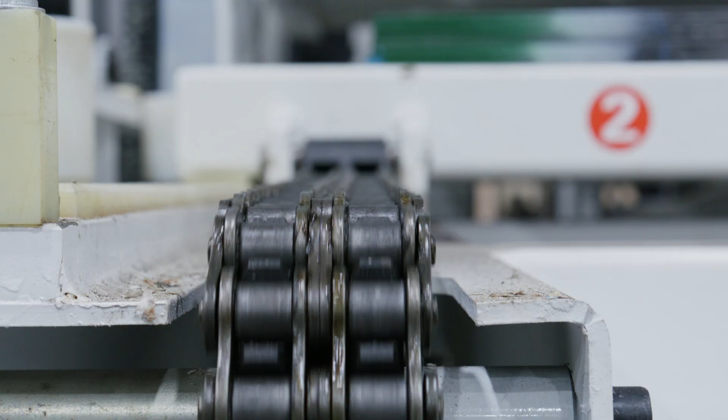So to start, let's look at the front of the car. Essentially what we have is as these bars come down, I have a point of contact that I actually am not a fan of anymore. Kind of with all the designs, they change over time. When I designed this thing originally, I had more of a rally car idea in mind, but I want to pull this back and have an approach angle on this that's a little bit more, I think it's a little bit safer.

So what we're going to do is, as I design the suspension, I'm going to end up putting in a bar across here and I'm going to tie it back and pull this whole front nose back. So we're going to have kind of a wedge design here, similar to most trophy trucks that you're going to see. Along with that, I'm going to build in a sheet metal mounting system in here that's going to be able to grab onto the front, upper and lower, and also mount my steering rack.

So the idea is that I want a similar spacing between my upper and lowers that I did on the rear suspension, which is 8 inches center to center. And then I'm also going to put in my steering rack in line with those. So as the suspension travels up and down with my steering straight, we're going to have little to no bump steer. So the next thing is we're going to reverse this entire thing into CAD, and then we're going to put those mounting points in space based off of my steering rack.

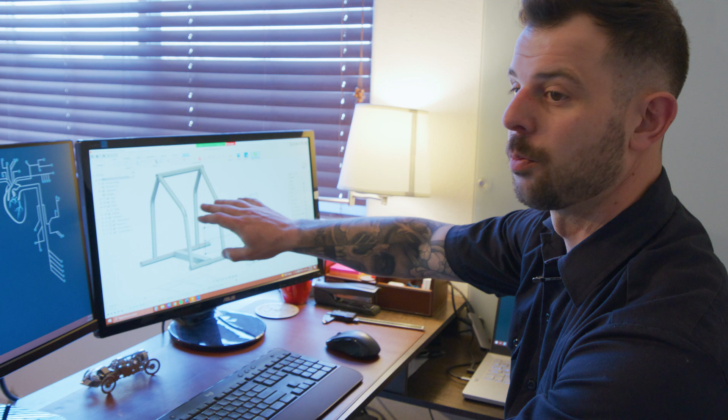So the first thing that I did is I reversed that whole front clip that's on the race car based off those measurements that we just took in the shop. I can give you a little 3D view. We have these bars that come down here, and I want to know essentially where I can put those suspension points within the center of the car with respect to where the tire and outside suspension is going to lay. Like I said earlier in the video, I want to have the suspension points on the chassis side to be 9 inches overall.

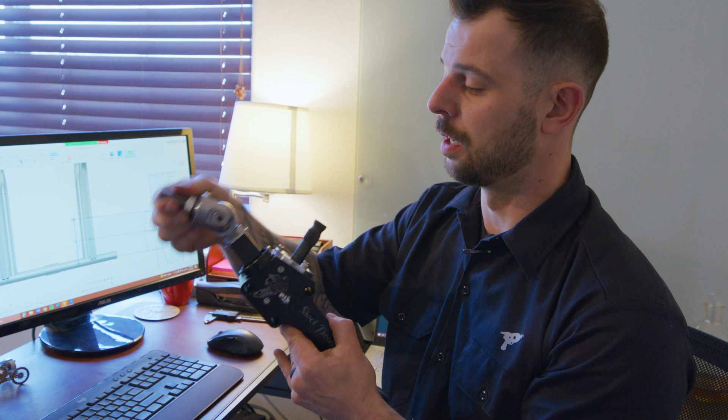I think I actually said 8 inches earlier, but I measured it and it's actually 9. So it's going to be 4.5 inches split off of where the center of the rack is. So this point right here is going to be the center of our rack, our heims that are on our rack. I have a Shock Therapy XP steering rack here. So this point of contact right here is going to be this point, along with the heims that are going to be on the A-arm. So we have a heim here that's going to be at that upper point.

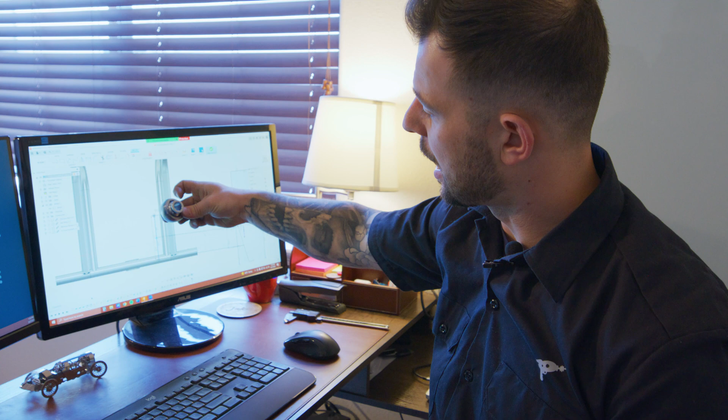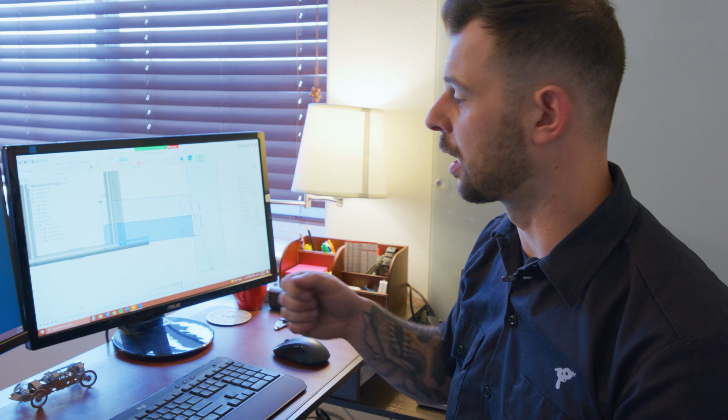What this is going to do is if I translate this to be the same spacing and I end up having that kingpin angle put in there, and I put in the right points of contact here, we can have that kingpin angle come down into the center. That's going to reduce any feedback in the steering. And then if we keep our spacing consistent, we're going to have a lot less change in camber as we're rolling through. And so that tire is going to want to travel a little bit better.

So we're going to end up having camber into the car. So as I roll into the corners, we're going to end up having the tires straighten up. And then the caster is going to be set when we build the A-arms, so we're not really too concerned about the caster right now. So as I roll this up and we look at this car from a different angle, we're going to see here, I just kind of centered everything in here.

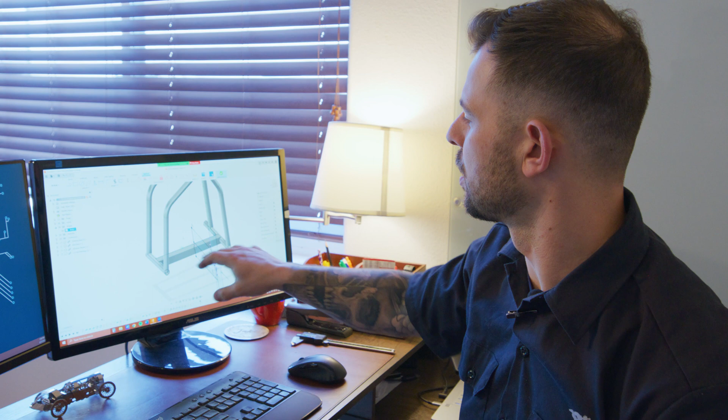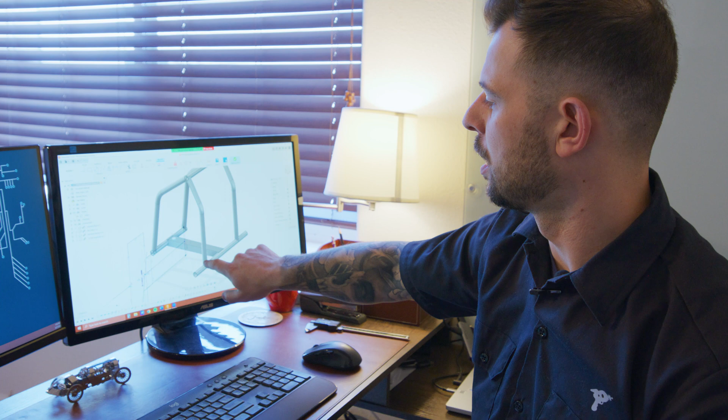So the next thing I'm going to do is go ahead and translate. I want to translate these upper and lower mounts. I want to put ones as far forward as I can get it here and here, and then I want to end up having ones that are about halfway back. And so I'm going to arbitrarily set those, and then we'll get into actually combining everything into one sheet metal design. So let's keep working on this.

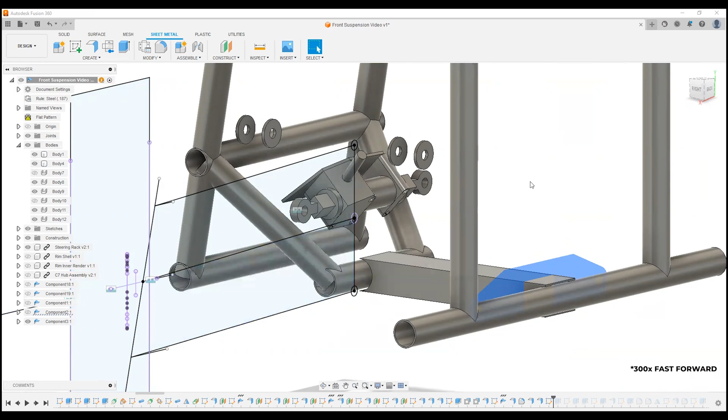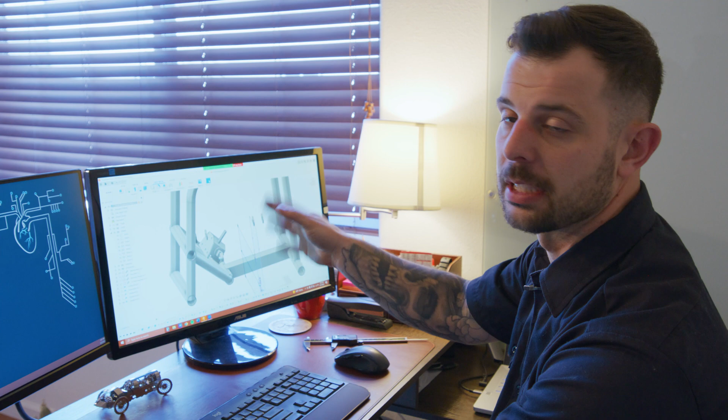Fast forward a little bit in the process, I'm gonna talk through what I've gotten through now, so we don't have this long montage. So following off of those upper mounts, I ended up adding another mount. And then the next thing we needed to do is establish where we want that steering rack to be. And so I went ahead and reversed the steering rack.

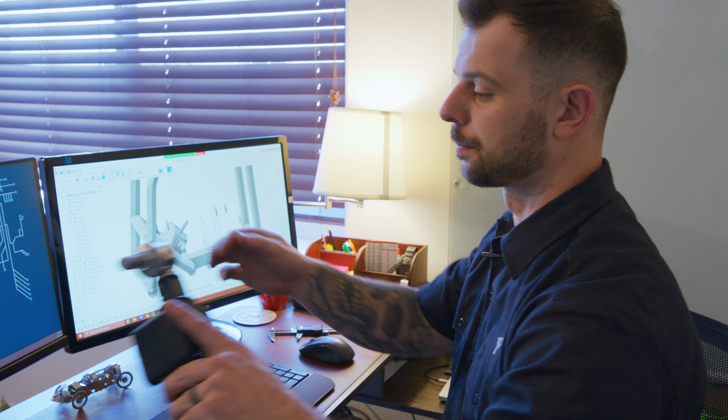So the most important thing is that we have this clearance that we need to have on the front end of this, as well as there's two holes here. And so I measured center to center on the rack to establish the width that we want to be at. And that determines how far off the center is from the center of the car to the center of these holes here.

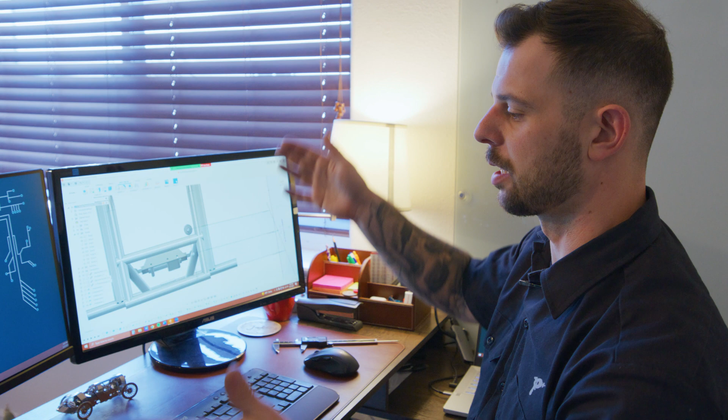So when I'm actually driving straight down the road, we're not going to end up having these be inboard or outboard, because what that'll end up doing is as that wheel's coming up and down, it's going to make the tires try to chase that radius and end up resulting in bump steering, a lot of feedback in the steering.

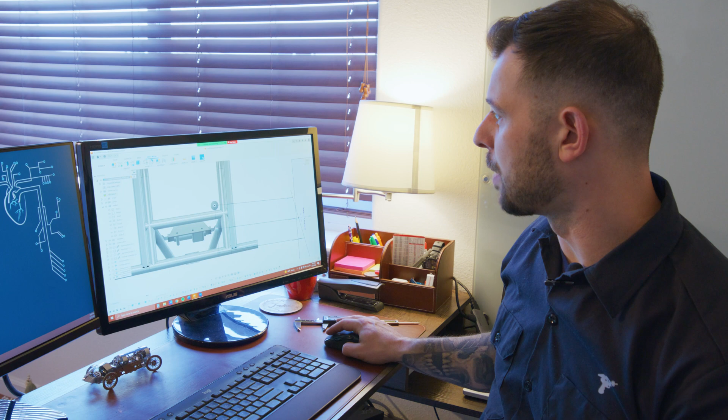So now that I have that established, you can see here, if we look at it on the front view, we're going to have that steering rack mounted. We can see here that if I end up hiding this body, we have the center of that rack, and I have these roughed in right now, but they're accurate. The center of that rack is going to be in the center of that steering location, as well as these two now are lining up.

I went ahead and also removed, or you can actually see the part that we're removing. So this is actually where it currently is. We're going to actually end up pulling this rectangular tube back and end up having that approach angle that we talked about earlier. So it'll end up looking a little bit like this in the end.

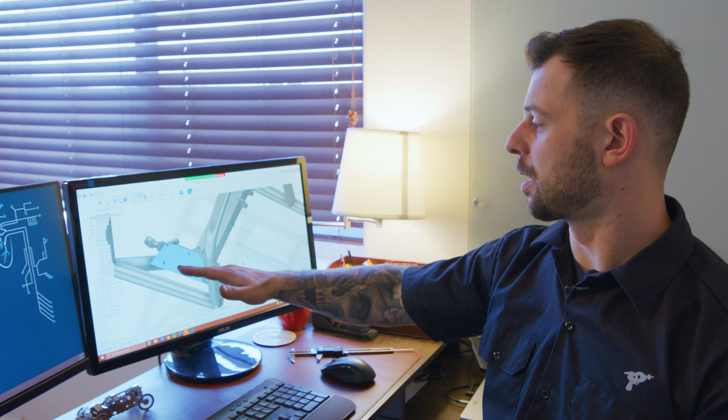Also, I ended up creating the initial flange that we're going to have in here. What I imagine is that this is going to come in and have a one-piece design that mounts the lower, and then it's going to come back, grab onto my steering rack, and then come back up and grab onto my upper mount. And it's going to be a one-piece design there. Then we'll have a double shear mount.

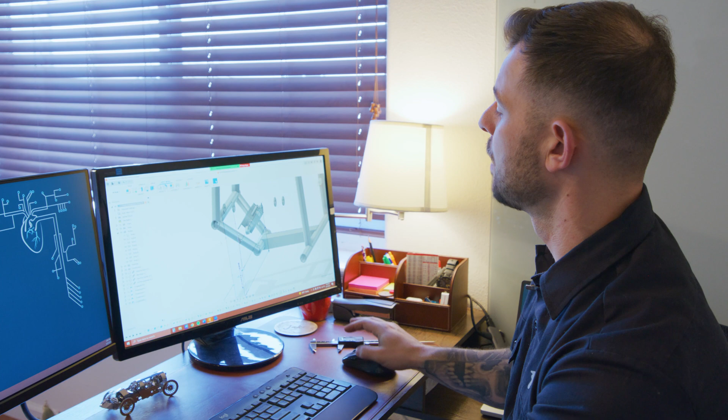And we're gonna do the same thing with the back mounts of the upper and lower A-arms. We're gonna have this little U or C channel that comes back up. So everything's moving forward. I ended up making these, they're spaced, I believe, yeah, 12 inches center to center on my upper A-arm. What that's going to do is it just gives us that little bit of space.

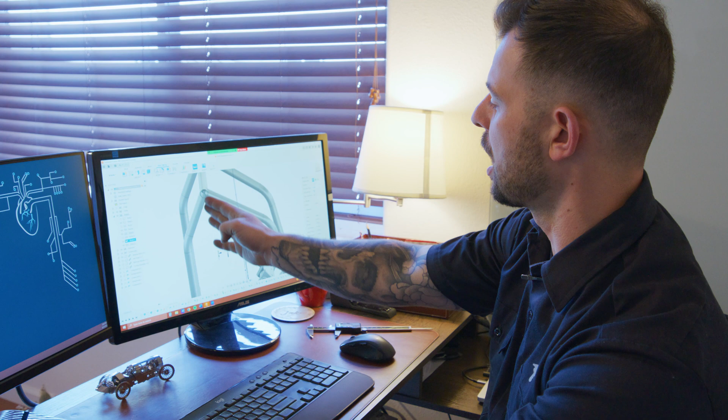I imagine that the shock is going to run here. So this A-arm is going to have to loop around a little bit just to make sure we have clearance of that shock tower and the spring assembly. But it looks like we're making good progress right now. I'm going to go ahead and move forward. We're going to fast forward into the next step, and then I'll explain that.

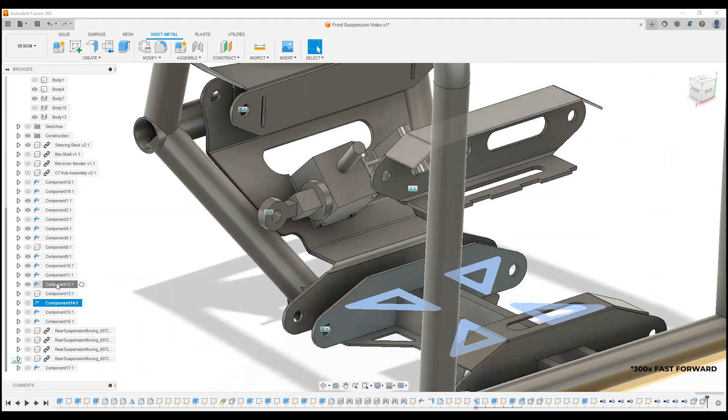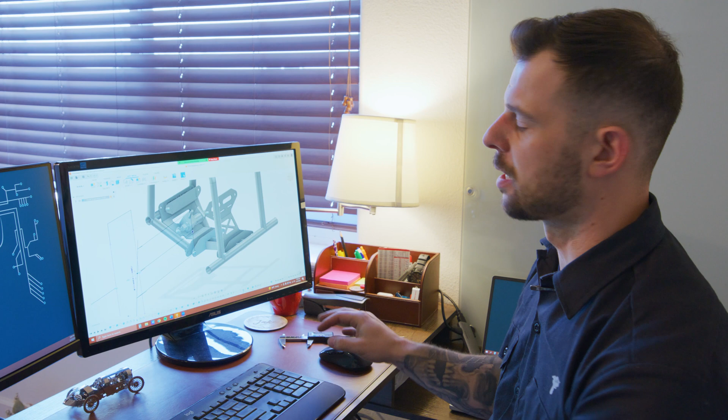So fast forward a lot. This took a lot of thinking and going back and forth, but now we're solidifying this design kind of like I talked about. The plans are still the same. I have the front and lower mounts that are going to be jogging in like an S or a little joggle forward. What we're looking at is I just want to be consistent and make sure that my lower and upper mounting points are still good.

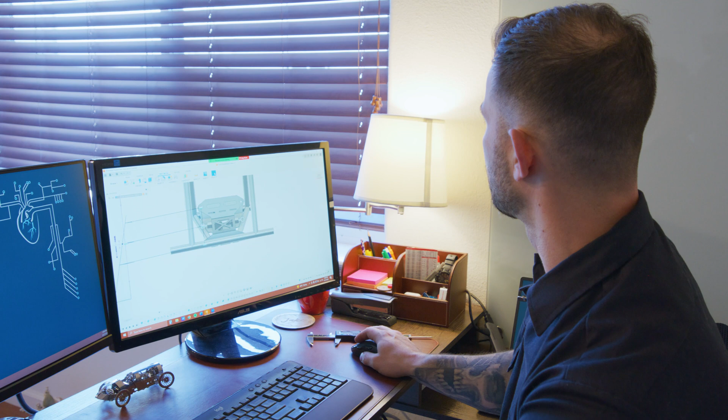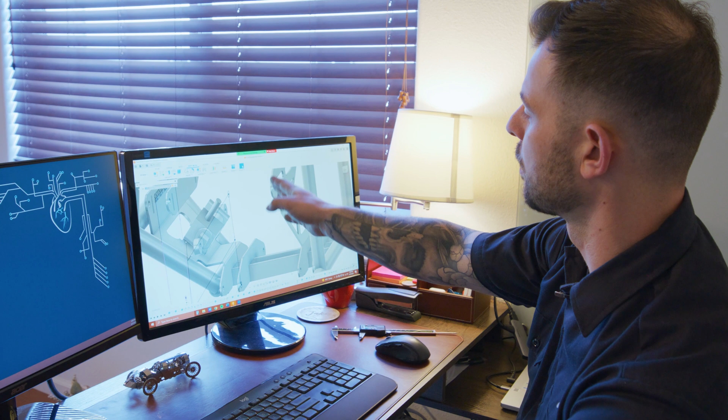So as we look at this, I guess we can't really see it from this side. Let's flip it around to the front. We can see here, we still have the upper and lower mounts centered on my original drawing, as well as the steering is still in there. What we ended up doing is I still have that steering rack kind of tied in here. I have this one jogging up, and then it S's up. I spaced this out, we mirrored it over, and then I also repeated that same entire program up here. So that's gonna S over and up.

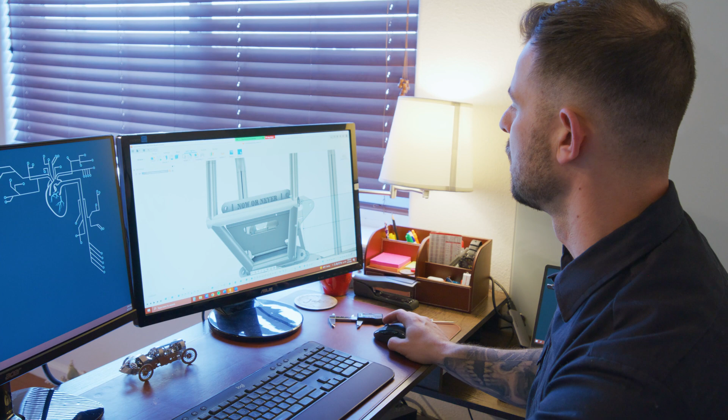It looks really good. We added a little text up here. There's some pizzazz on the design. It's always kind of fun to look at that. And then I also added an access hole here. So what we're gonna end up doing is I'm gonna make a mount that ties in sideways and comes up and ties into these through holes right here. We're gonna have a tab and slot design there.

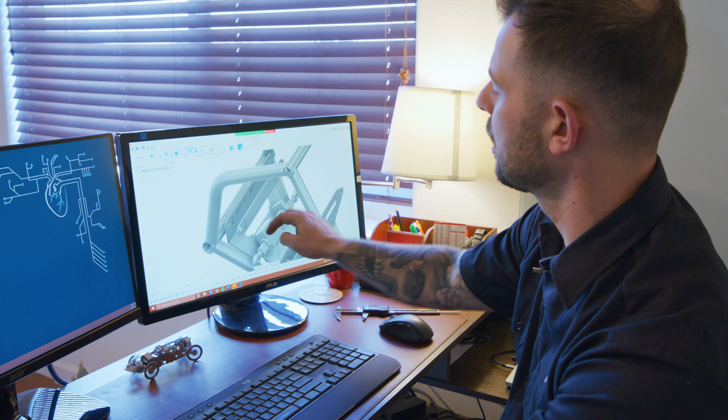And then along with those holes, the bolts are gonna actually come up through the bottom and through that plate. And so we'll have Allen key access from the bottom, and then we're gonna have nuts on the top. So you'll either be able to put a wrench on from this side, or you can wrap back around and see those nuts from the outside. So it gives us some accessibility to where our steering rack is in the design.

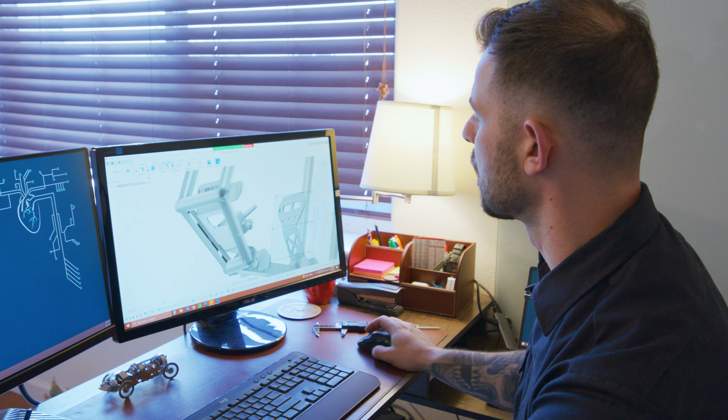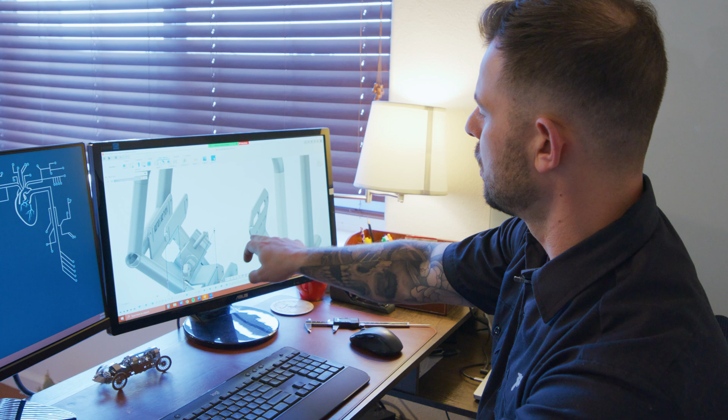Lastly, what we're gonna end up doing is we're just gonna gusset everything in. I wanna tie in and web in this entire structure from the front all the way to the back, and I want it to come all the way out as close as I can get to the heims, but still have clearance for articulation. I want to wrap this design in here to have double shear as well as in here, and then I gotta come up with a way to support this upper mount in the back. So this front one I'm going to tie obviously to these front bars.

The back mount I need to come up with some new bars coming from back to the front. What I imagine is I'm going to run bars laterally or horizontally across the car, and then we're gonna have bars that come down to that upper mount for the rear side of the upper A-arm. So I'm gonna go ahead and get back into it. We're gonna cut forward one more time. I'm hoping that this one's the final design. This one's taken me a while to figure out. There's a lot of little pieces that we're trying to look at, and then we're gonna go through each individual detail before we go check it out on the car.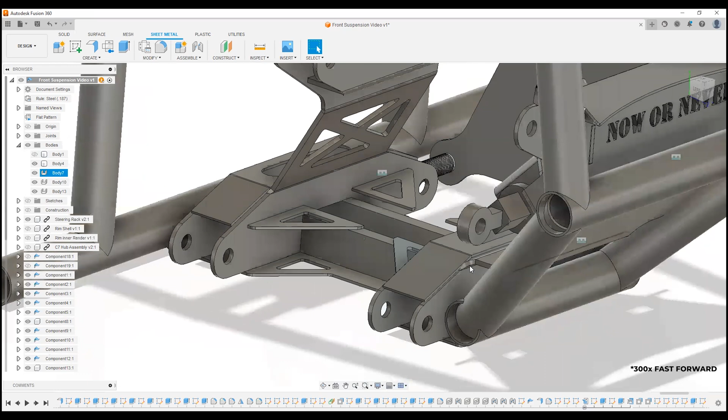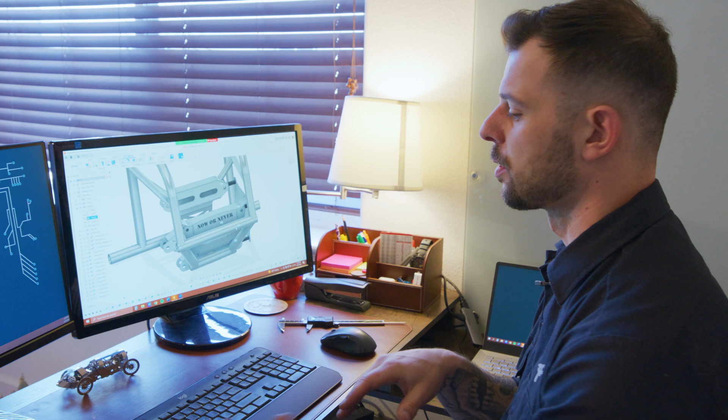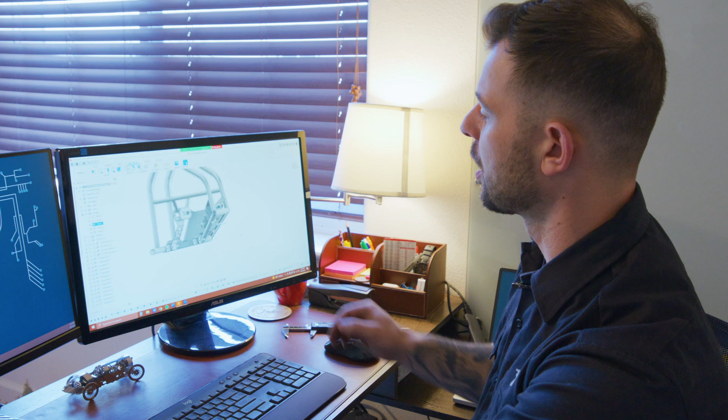So after a lot more work, I finally have kind of a finished design here, pending how it looks in cardboard and checking a lot of different templates in the shop off the CO2 laser. But let's talk through this one a little bit. So before, we had that bar come all the way down far forward and come back. We ended up cutting and triangulating this a little bit. It has a better approach angle, and a little bit better look in my honest opinion.

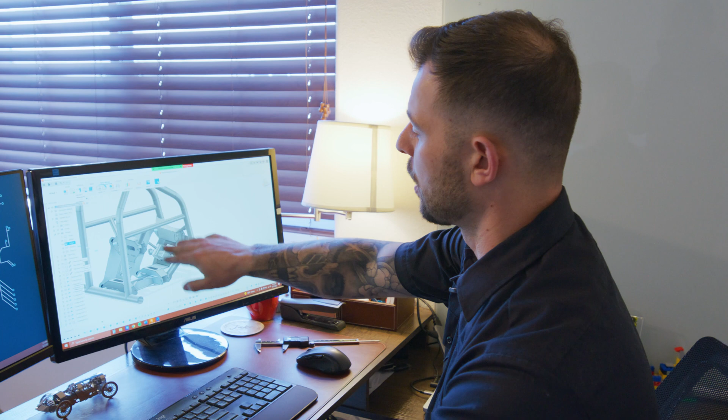With that being said, we have a steering rack that's fixed, right? So we're working based off of where the steering rack is and where those upper and lower A-arm mounts are going to be on the frame. That's really important for them to all be lined up, so we get rid of that bump steer, like I've said many times. And so I referenced the steering rack to start. And then we obviously have fixed holes that we're trying to match up. So this is gonna be the first thing that I check in the shop. I wanna make sure that I have that hole pattern correct before I order these parts in sheet metal.

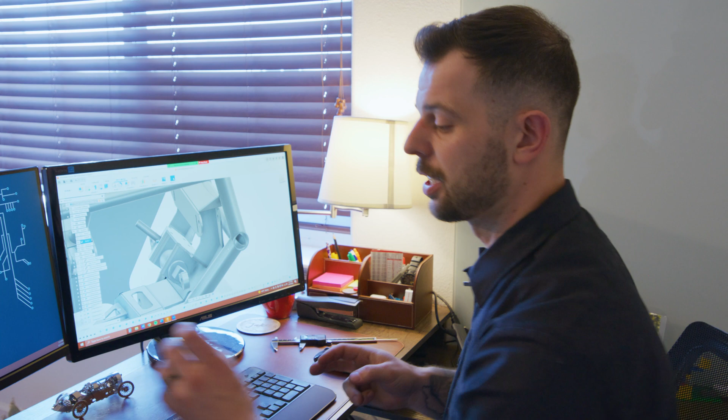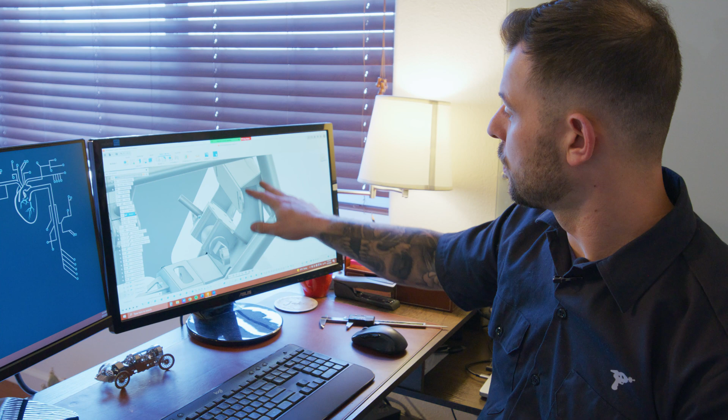The next thing is that we have a spacing between these upper and lower, or these double shear mounts. That's a fixed measurement. That's based off of spacers that I've purchased along with the Heim that we're gonna be running. We're running 5/8 bolts in the front, and then the spacing is 1.875. So what we're wanting to do is we just want to make sure that there is at least 1.875 in those upper and lower mounts. And that's going to be the same on all 4, or I guess all 8, left and right.

Lastly, what we're going to end up doing is we have this gusseted in area. So this square tubing actually runs all the way to the front right now. What we're going to do is we're going to cut that back. It's going to end up being cut flush with this one mount right here, and we're going to put in a new pipe there.

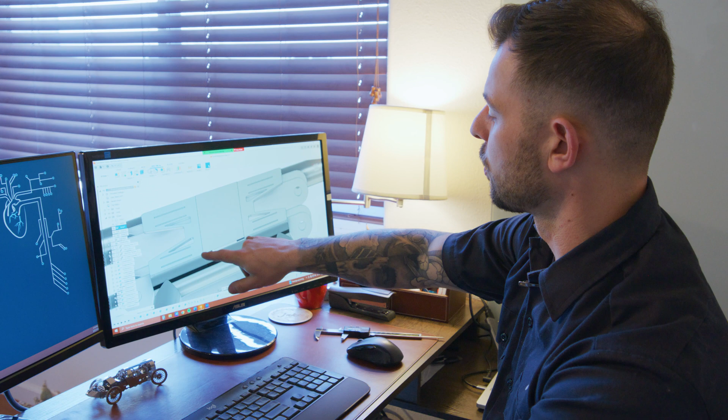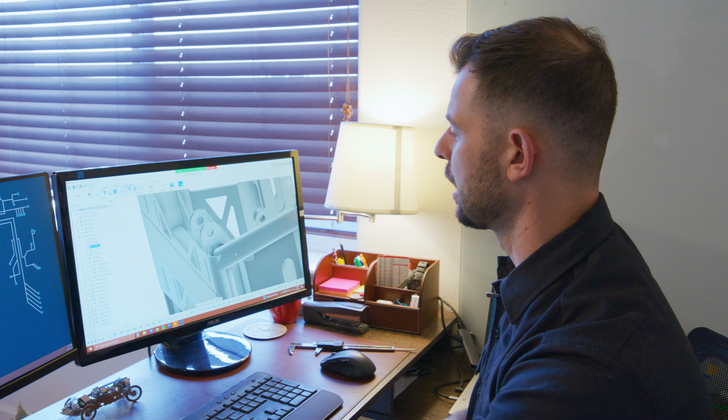Where these gussets are going to come in is they're going to tie in that whole area. They're also going to tie into a tab and slot design here. So these tabs right here are 0.1875 mild steel, and then we're going to end up having all of our gussets made out of 0.104 thou thick, just for that bridging or that gappage. That square tubing is flush with the bottom of the chassis. These are also going to be running flush, so we're just going to kind of weld it all in to tie it all in.

Lastly, we have some gussets here. I need to fix this little area right here still because it got cut on a different operation. But we have some gussets here. These are all going to be 0.104 thousandths mild steel, whereas all of our brackets are going to be that 0.187. So when we run from here to here, what is going to be nice is that this is going to be one unit that's going to add a lot of racking stability, as well as tie in this entire front suspension so that we have good stability in all axes.

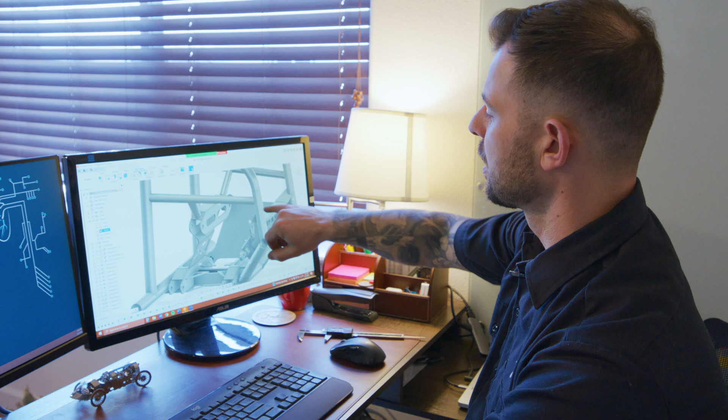Lastly, what we talked about last was running in this round tubing from front to rear. I just have it mocked in right now. This is all going to go into place, and then I'm going to weld this in last. So these will be the last things that I do on this front suspension mounting on the chassis. And that's just because it doesn't really matter where they're at. They're mostly there for stability. So it's more important that we have this in the right position first.

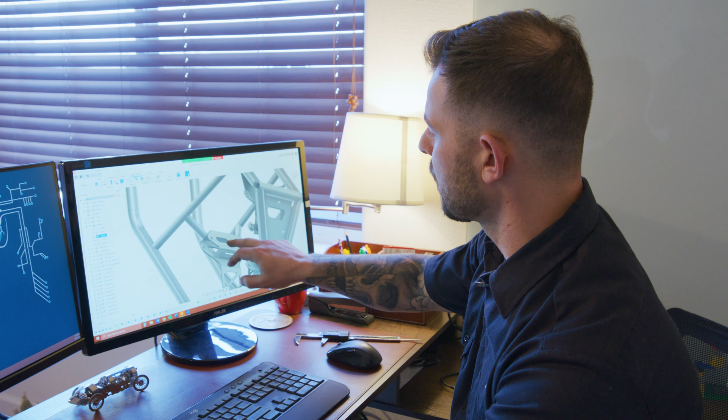This bracket right here is just an L bracket. So this L bracket comes around and ties in. We have tab and slot to make sure that it has good connection. And then I have essentially a 0.104 mild steel that's wrapping the top. This will get seam welded all the way down, and then these tubes are going to come in and attach on the top, and that's going to help with that stability also.

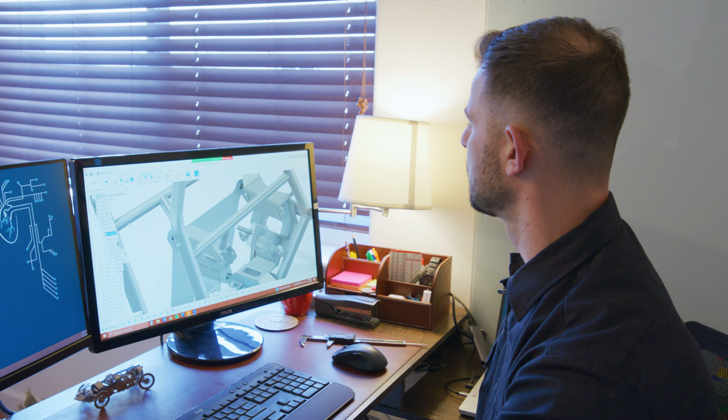Lastly, we have this little wing design here in the front. This is going to be just tied into there and dropping on the top. I don't have tabs on this one, mostly because I want it to float a little bit, because I don't really want it to determine where these mounting points are. I want those mounting points to be determined off of where the heims need to be.

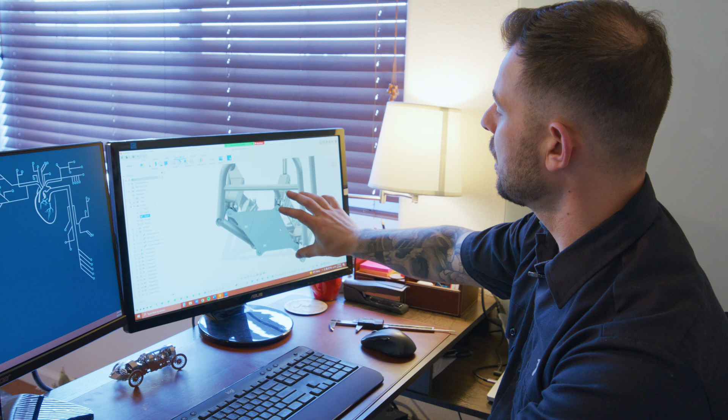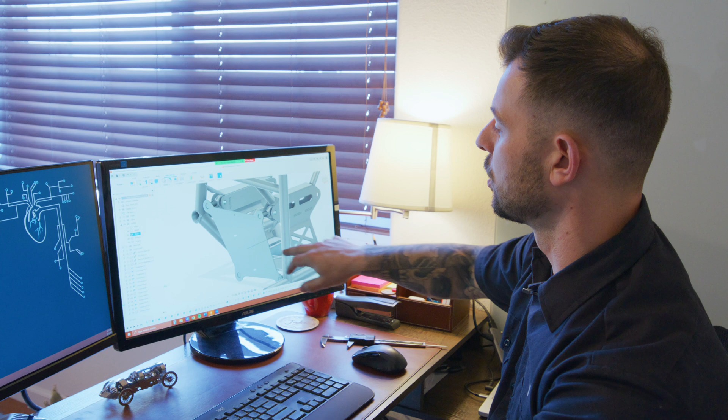And that leads me to the last thing that I did, which is I'm making a fixturing plate, and this one's just going to be out of some thinner aluminum. I'm putting a little small hole just to tell me which side is up, because it's going to be hard to tell orientation as we do this. But the idea is that this will slide onto the heims. We can put a nut on it, and then those heims can go into each corner. And with the spacers, this ends up determining each individual location. And so if I make 2 of these, one on each side, and I put it all together, we should be able to actually make this entire assembly on my weld table, or at least tack it together, and then drop it in one setup.

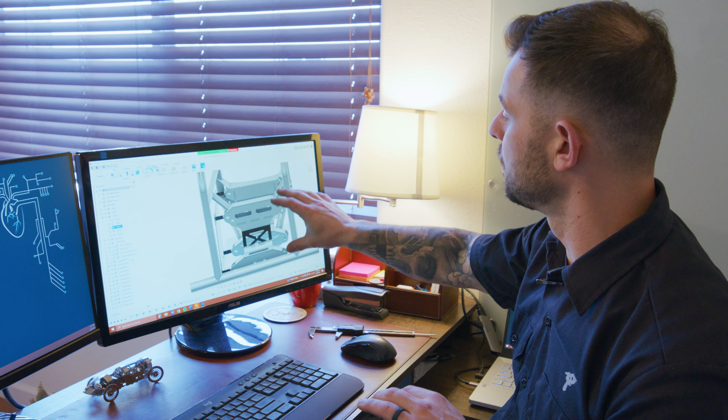And that'll save us a little bit of time in fixturing and holding and stuff inside the car. That's just the theory anyway. I also think it'd be a really slick way to do this, and I just want to experiment with this theory. So from here, let's go ahead and make some DXFs. I'm going to take you through a really quick tutorial on one of the more intricate ones, just on making a flat pattern. Then we're going to go cut them out in CO2 and get them in cardboard for this one.

So before we get too far into the flat pattern, I want to show you a couple tricks. I'm using Fusion 360. Most of the CAD programs have some kind of feature like this. And so when you have a lot of pieces like this, and we've gone through a lot of different iterations, so I have a couple hidden bodies and stuff, it's sometimes really hard and convoluted to figure out where those parts are at. And so if we want a specific part to check, or we want to make a flat pattern to start, it's really hard to figure out where it's at.

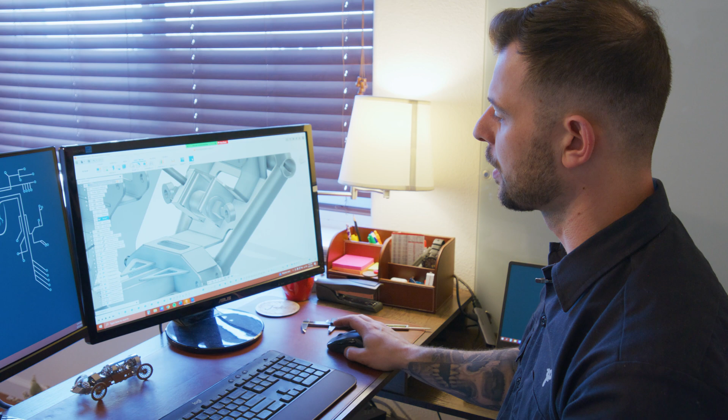So the first thing I typically do is I can right click on it, and I can say find in browser. What that's going to do is I have components. I typically try to make everything in components, because then they're individually sourced instead of bodies, which can be kind of convoluted, and if you make changes it kind of affects the assembly. But we can see this whole body here.

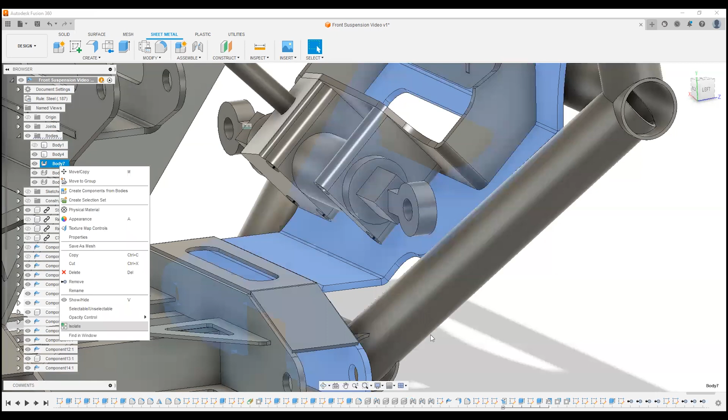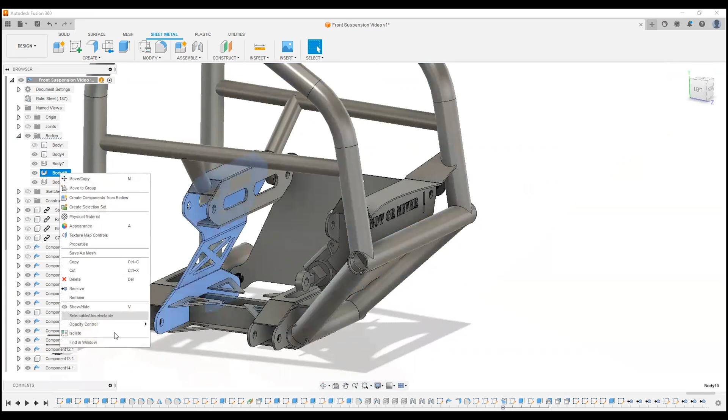Instead of having to go through and deselect all of them, there's an isolate feature on this. And the cool thing about that is that I click that, I isolate it down to just the one fixture, which is really cool. And then if we want to bring everything back, we can come back and unisolate, and we get the whole assembly back. It's a really cool trick that we can bounce back and forth between each individual component, and if we want to see this other one, we can bounce back and forth.

And so that leads me to my second point, is that when we create a flat pattern, there's kind of two different ways to do it. In Fusion, you can only create one flat pattern per assembly, but you can create one flat pattern per component. So what I typically try to do is I actually will select these and create a component from the body. What this does is I'll end up,

it's always something.

Oh, that's right. So we can't do it for sheet metal bodies. So that's a trick that I keep forgetting that I can't do here. But on this one right here, if I didn't select component the first time I made it, I'm kind of out of luck. So I gotta just do individual flat patterns. So now I can come up here, create flat pattern. I don't typically have a problem with each individual, like I can select any of these faces as my flat face. I'm just gonna pick this one, we're gonna create it.

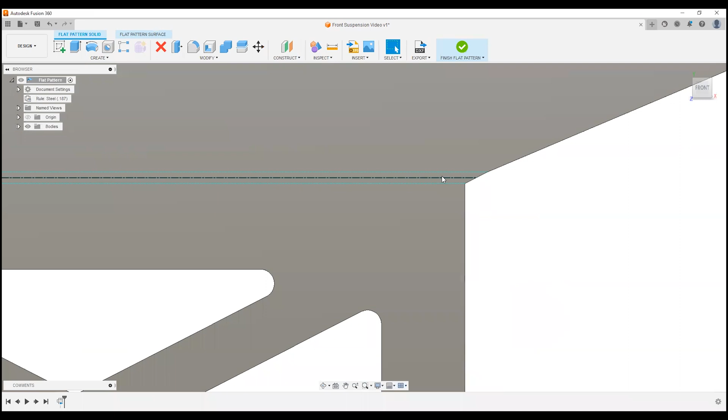So we're gonna see here, we're gonna pull in this DXF. So the last thing that we wanna do is we're gonna see here, we have our radius ends on each side of our bend center line. So we just wanna make sure that when we finish this, we wanna look at our sheet metal rules, where this part right here is 1875. We want to double check the K factor is correct, our thickness is correct, and our bend condition is correct,

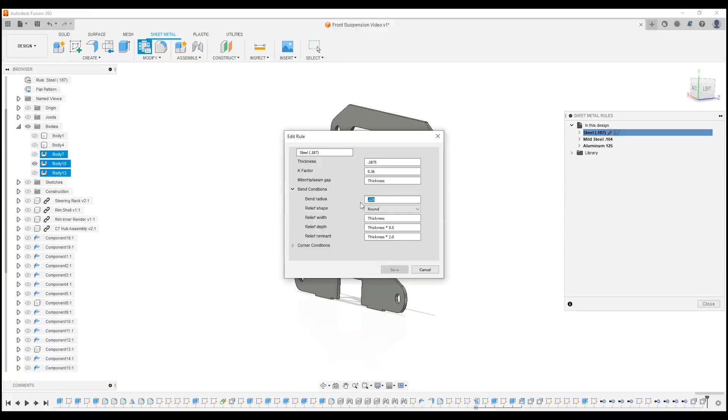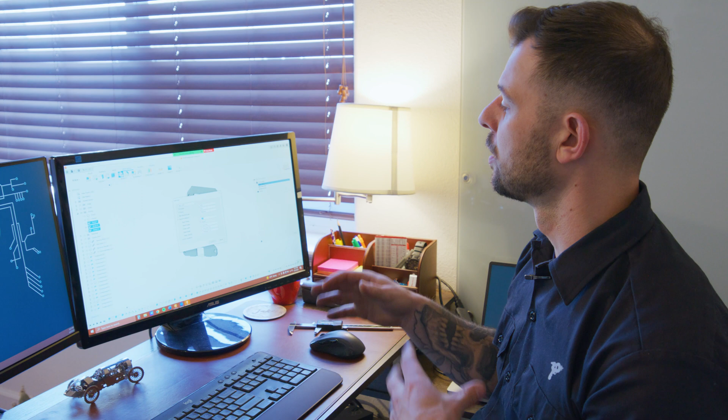our bend radius. Since we're using SendCutSend, we want to go to the material details on each individual material that we're using and make sure that those are correct so that these jogs are going to come out to the right amount of stretch. Since we're trying to locate two different components on both sides, it's really important to have those correct, because especially with two bends and a joggle like this, that could throw us off by 1/4 of an inch if we don't have those correct. So if we select that, everything looks good. I already double checked this kind of stuff.

We can go back into our flat pattern, activate. And so the cool thing is that we can export a DXF right here. And so Fusion makes it easy. I convert my splines to polylines and click OK.

And then we can save our DXF and move forward. If we're doing a normal flat part, a little trick that I typically use, and we're gonna unisolate this part so we can see something. Say this part right here, we're gonna find in browser because we have a lot of parts. And we're gonna isolate this part.

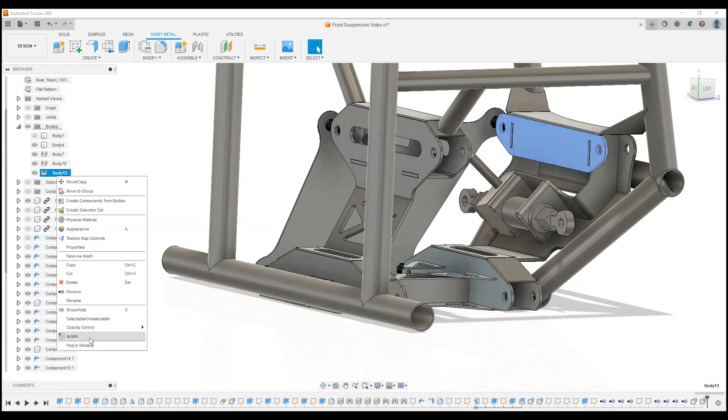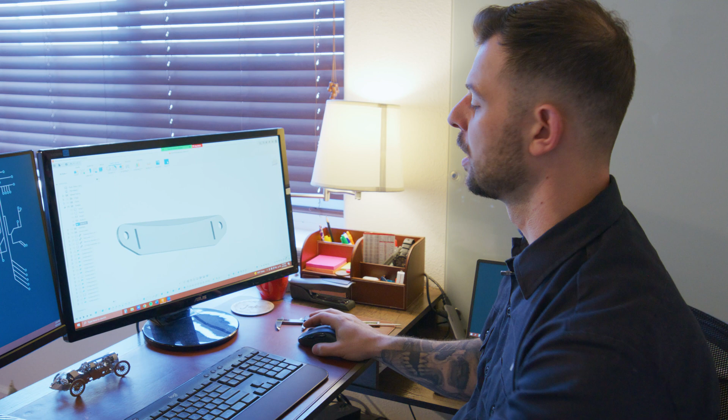So sometimes we end up having a part, I don't know why, sometimes I get these little artifacts that are built into this one. This is a really good example. And so to make sure that this line doesn't come through on this, most likely it's because I wanted this curve, and then I came back in and I re-extruded something to fill back in that area. And then you get these artifacts. This side doesn't have that artifact.

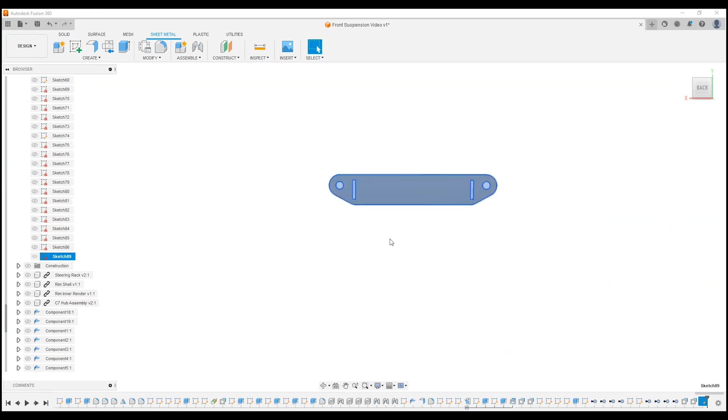So what I typically will do is come in and create a new sketch on this side and say finish. And then if I go to my sketches and I come all the way down, we have a lot of sketches in this design, and I select this one, you can see here that in blue now I have a perfect sketch of that. I'll right click on this and say save as DXF.

And what this does is, instead of using the last sketch that you had that has, say, dimensions in it, or that you used to extrude it, sometimes those have little artifacts. So once I have everything extruded and I have a nice clean face, I'll click on that face, create a sketch, and then I save the DXF off of that. It just cleans up your design, makes sure everything is where you wanted it to move forward.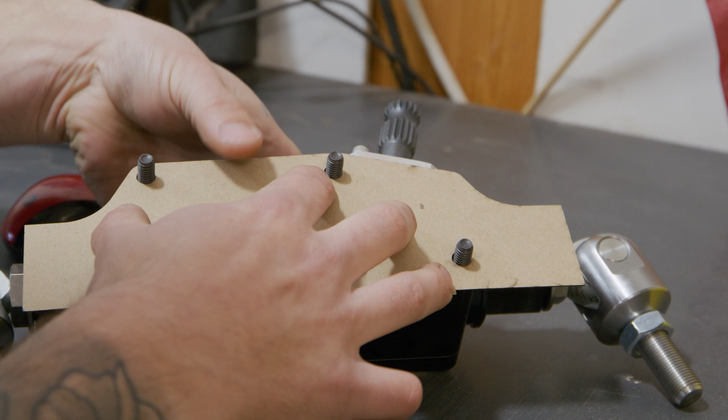So now that we're getting all these DXFs, let's go out in the shop and check this design. So what we're looking at on this is I want to just check my template and make sure that everything lines up. So we're going to flip this over. And then we're just checking hole pattern. I'm also checking to see how well I got that angle reversed. Everything looks like it's going to clear. So I think we're good to go there.

So the next step is now we're gonna cut that whole assembly out of cardboard so we can actually glue it together and mock it up for the car. While the other parts are getting cut out on my CO2 laser, I'm gonna double down on my time and start gluing these up as they're coming off to get this final assembly done.

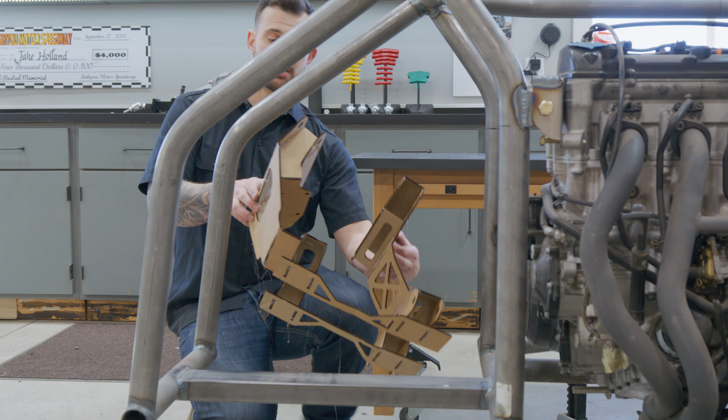Okay, now that the whole entire assembly is glued up, we can go ahead and check this in the car. It's really important that we're looking to see if this thing can fit in the car while it's all upright, to know if I can actually weld this thing up on my bench. So I'm gonna hold it in its orientation. And I think, yeah, we have plenty of clearance even if we're opened up. So I feel really good about welding it all up.

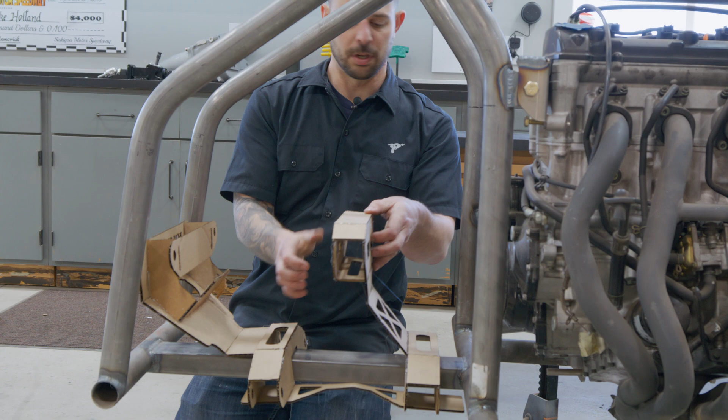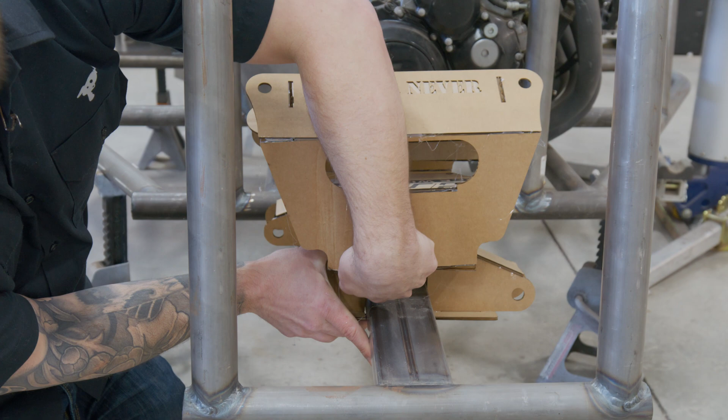We're gonna drop this thing down and look at here. So that looks really good. There's actually one mistake that looks like I've made, which is if we look down here on the end, we can see that I have too much clearance built in right here. So it's gonna be really important to note that. I wanna make sure that I'm flush with the bottom. That's the most important thing.

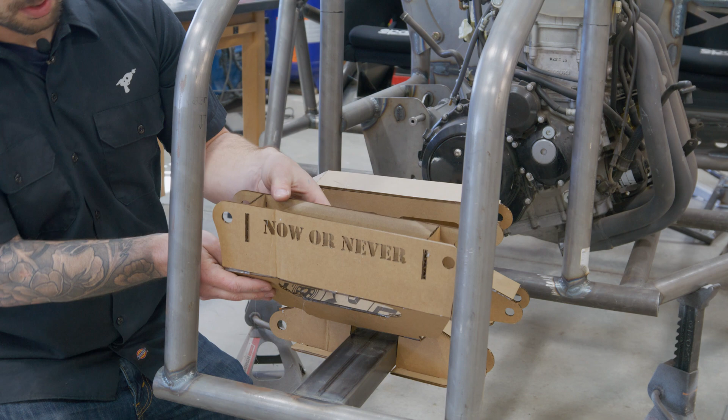I don't want anything sticking out below the car to catch on anything. And we wanna be able to weld on this surface here, obviously. So I need to shrink that up. I'm gonna go ahead and take a tape measure to that. Other than that, I'm really happy with how all the mounting points are looking. Looks like we got clearance here. We're gonna end up putting that one bar in below right here, and then we're gonna tie backwards. So we're gonna actually remove this whole bottom chunk. Looks really, really good. So that's the end of this part one.

Part two, we're gonna go ahead and take this cardboard design. We're gonna go back into CAD. I'm gonna show you how I put it into SendCutSend's website to get our metal parts, and then we'll get this project finished up.